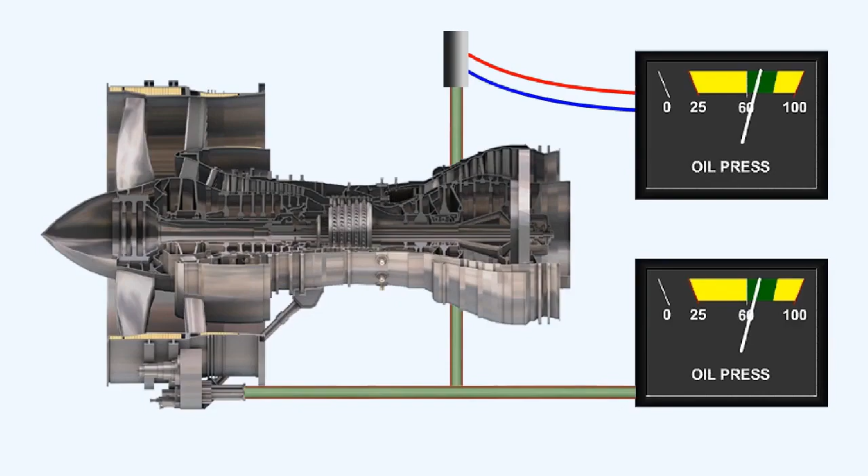In many of the systems associated with the operation of the aircraft and its engines, liquids and gases are used, the pressures of which must be measured and indicated. The gauges and indicating systems fall into two categories: direct reading and remote indicating.

A remote indicating system uses a remotely positioned sensing element, which is connected to the pressure source. The sensing element translates the actual pressure reading into an electrical signal, then sends the signal via electrical wiring from its remote position to an instrument in the cockpit.

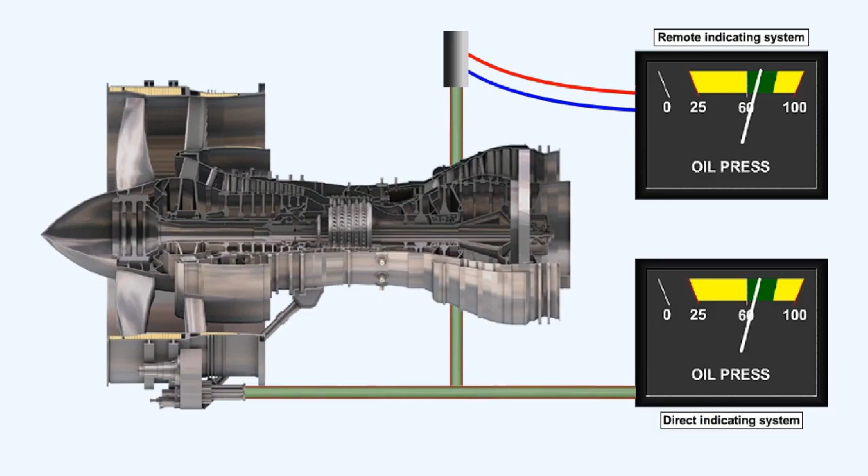A direct reading pressure instrument is physically connected to the source of the pressure that it's sensing. For instance, a direct reading engine oil pressure gauge will be connected via an oil pressure pipeline directly to the engine, to the point where the oil pressure is to be measured. Colored arcs of green, amber, or red are used to indicate the range and limits of the pressure system.

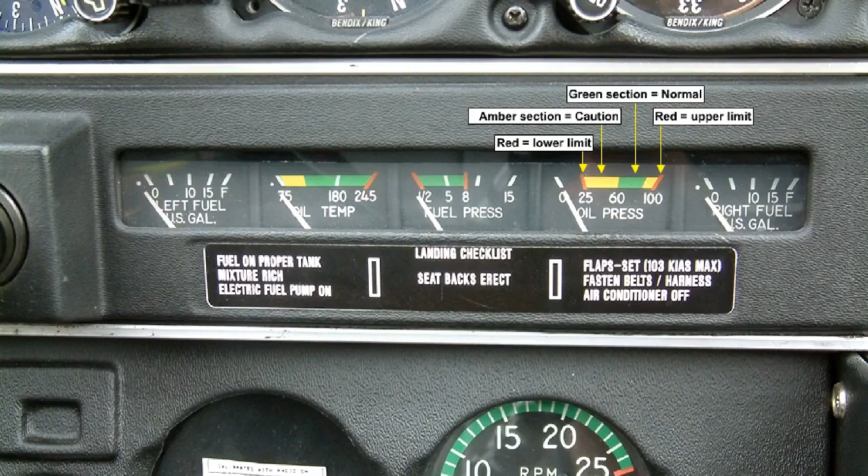Vibration monitoring equipment is fitted to almost all commercial jet engine aircraft. Although gas turbine engines have an extremely low vibration level, any change in that level is usually indicative of damage which may lead to failure.

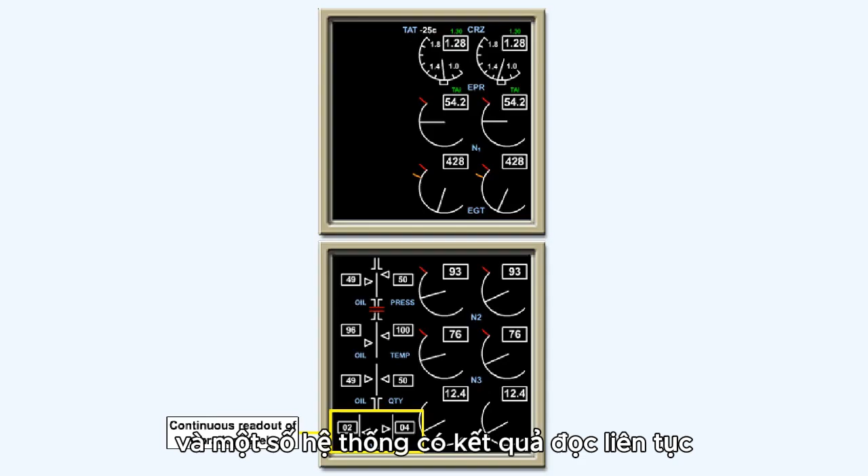Warnings will be given in the cockpit if the vibration levels are exceeded, and some systems have a continuous readout of vibration levels. Modern engines have the facility whereby the vibration level of each rotating assembly can be monitored, so that the source of any vibration can be pinpointed.

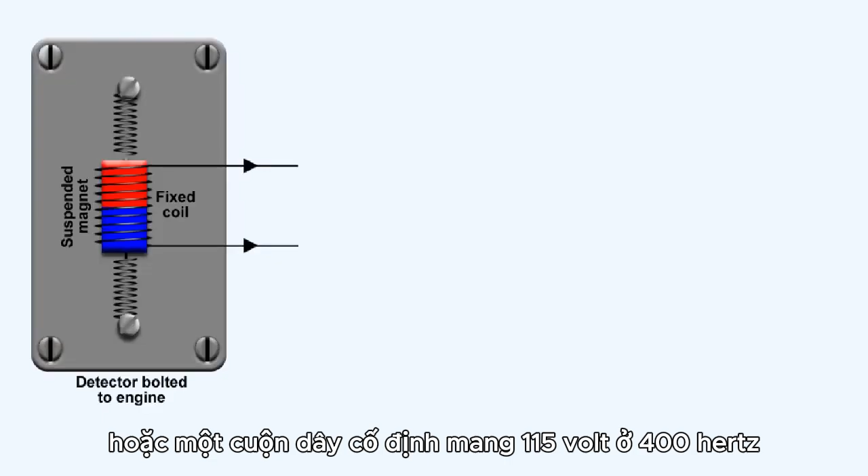The principle upon which vibration monitoring equipment works requires an input from a detector, which can be either a piezoelectrical crystal mounted strategically on the engine, or a fixed coil carrying 115 volts at 400 Hz, the output of which will be affected by the movement of a magnet within it, which is mounted on springs.

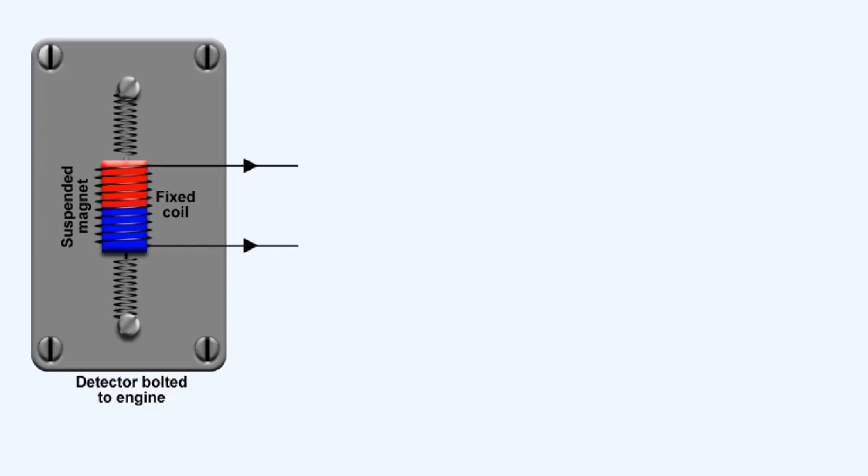In either case, the frequency of the incoming vibrations will be amplified, and then filtered so that only those frequencies that are indicative of damage occurring to the engine will affect the output.

The output of the detector will affect the current flowing through the coil into the amplifier and filter. The filter will erase any output which is normal to the engine, but allow through to the amplifier any frequency that's considered to be harmful to the engine.

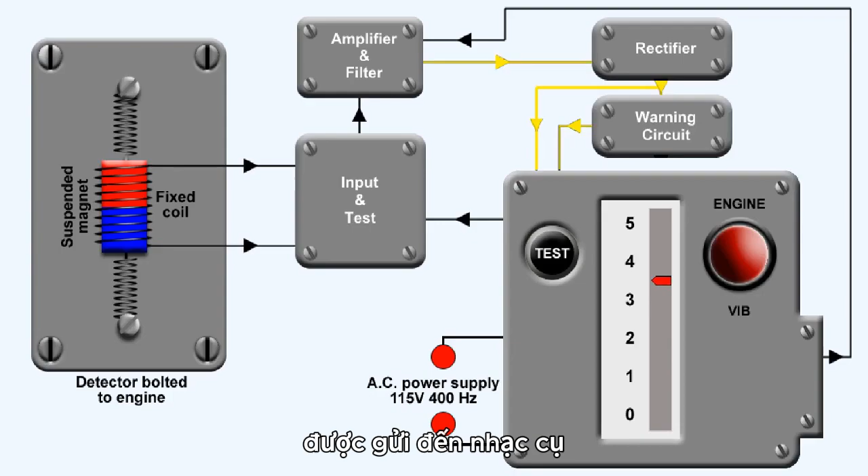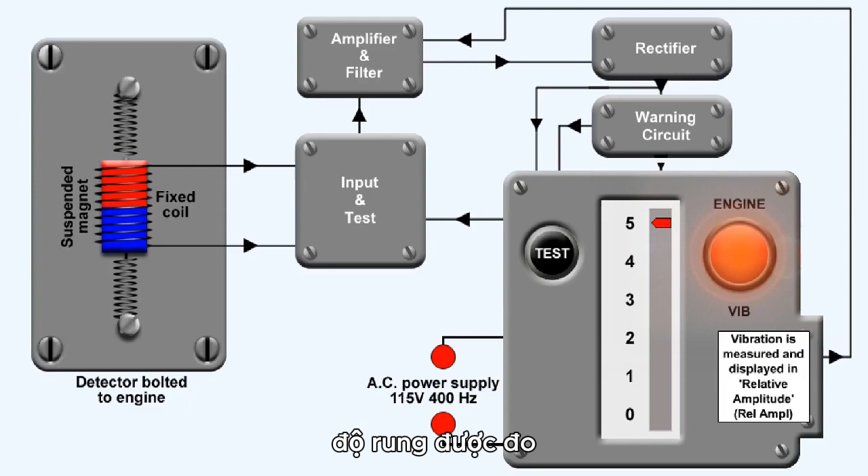The result of this amplification is sent to the instrument via the rectifier and warning circuit. The needle will show the appropriate deflection for the amount of vibration being suffered by the engine at that time. If the level of vibration exceeds a predetermined amount, a warning light on the instrument illuminates. Vibration is measured and displayed in relative amplitude.

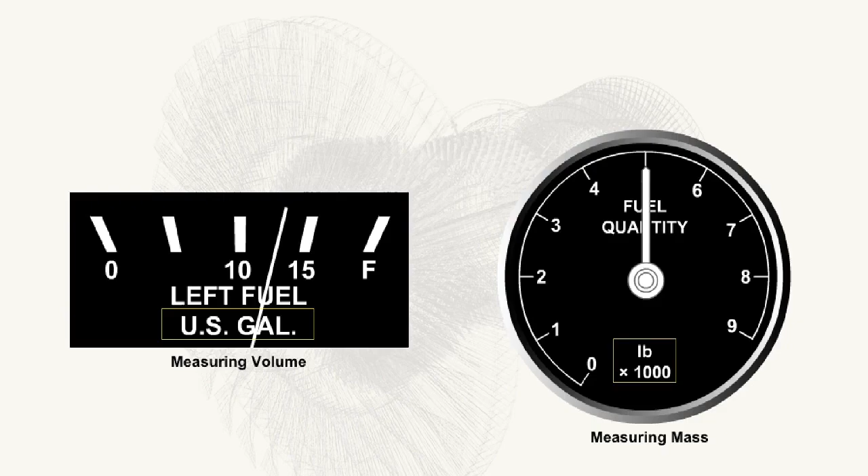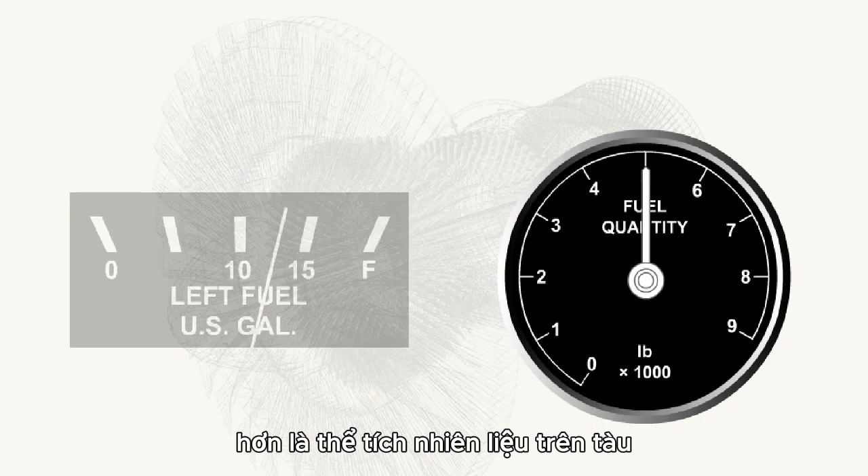There are two methods of indicating the quantity of fuel carried in an aircraft. Either the volume, for example gallons, or the mass, kilograms or pounds, are measured. Because the mass of the fuel on board is of more interest to the pilot of a large aircraft than is the volume of the fuel on board, measurement of the volume of fuel is now only used on light aircraft.

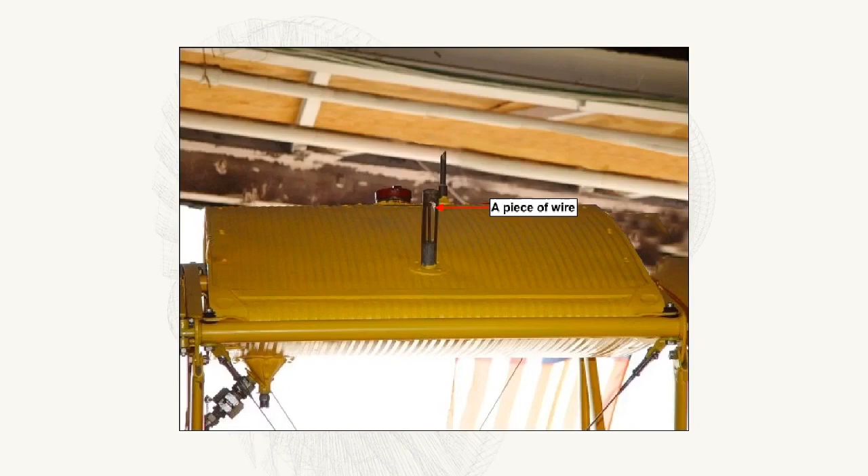The simplest form of volume indication is a float system. Early aircraft used a float which sat on the surface of the fuel in the tank. Attached to the float was a piece of wire that protruded out of the top of the fuel tank. As the fuel level reduced, so the wire disappeared from view.

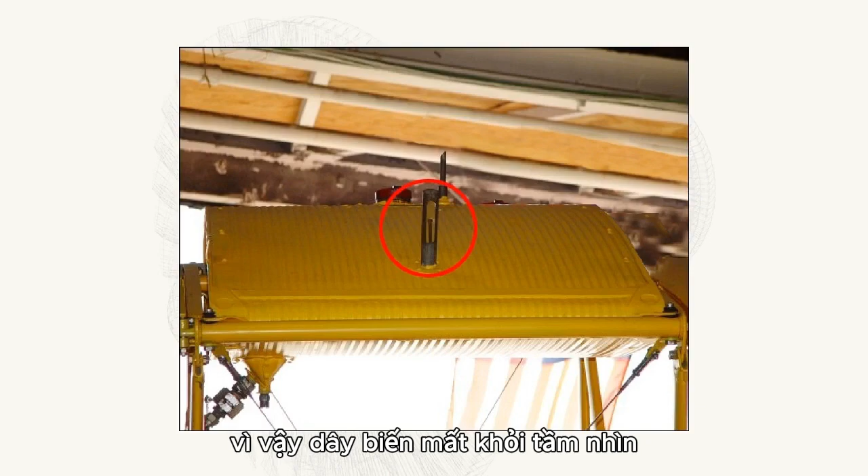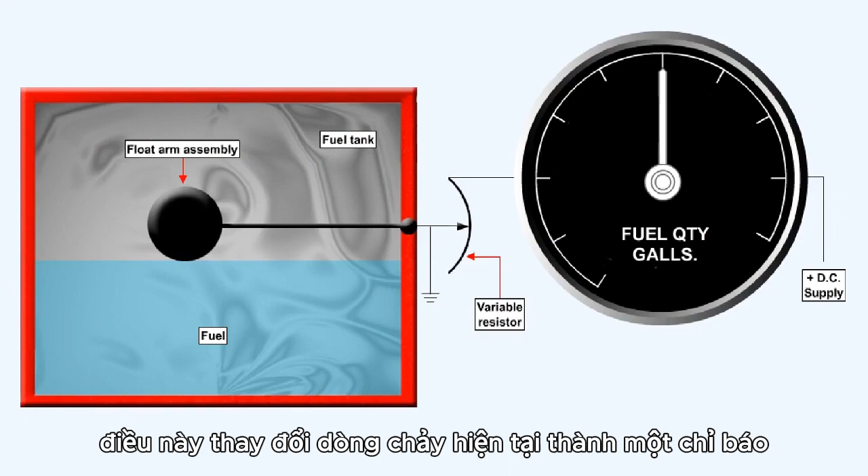A later system used the float to reposition a wiper on a variable resistor. This varied the current flowing to an indicator which had a pointer that moved over a scale calibrated in volume. The system was powered by direct current.

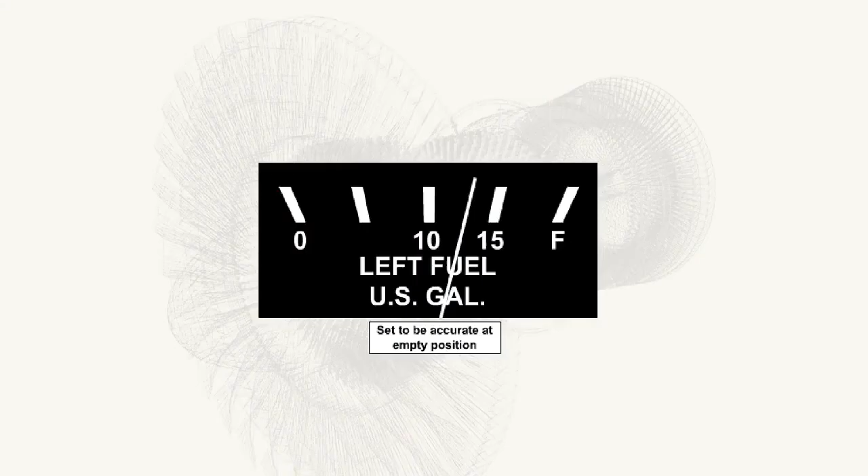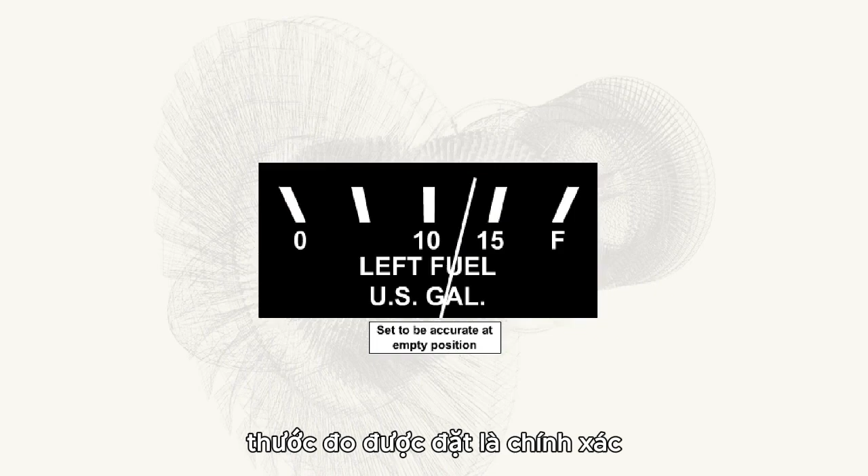The disadvantage of the float system is that the indication is not linear, and there is no provision for making adjustments for system accuracy. The gauge is set to be accurate at the low and empty positions. The system is also subject to errors caused by temperature changes, aircraft attitude changes, and aircraft acceleration.

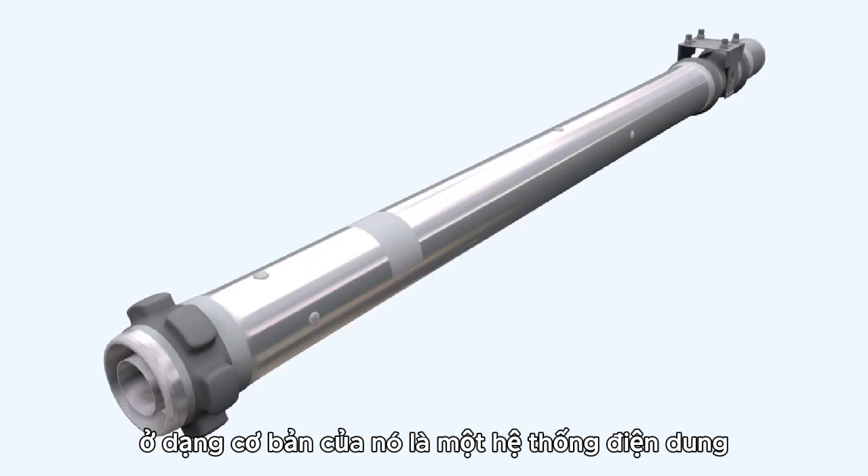In its basic form, a capacitance system, which is much more accurate than the float system, consists of a tank unit, which is effectively a variable capacitor, located in the fuel tank, together with an amplifier and an indicator. A tank unit consists of two concentric aluminium alloy tubes, which are held apart by pairs of insulating pins. The coaxial electrical connections are insulated and the unit is insulated from the tank.

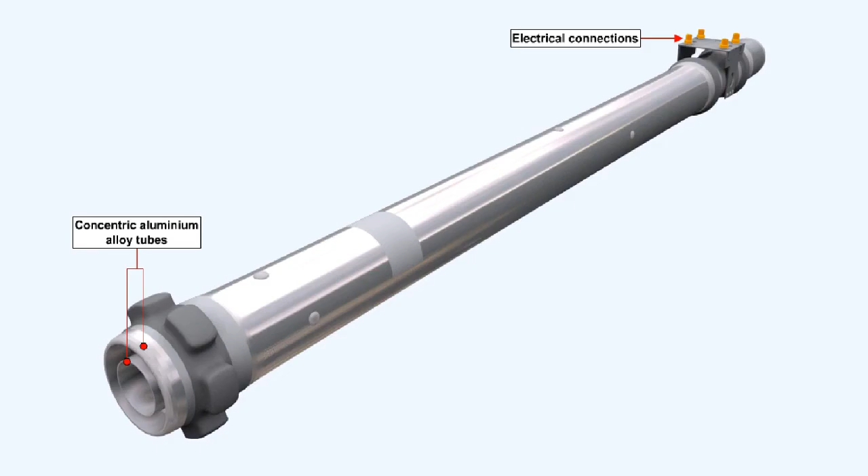The principle of operation of the capacitance system is based on the use of fuel and air as the dielectric between parallel plate capacitors, which have a fixed area and a fixed distance between them. The only variable in the system is then the ratio of the dielectrics used, which are fuel and air. That ratio is determined by the quantity of fuel in the tank.

Incorporated in the system are reference units, which reduce indication errors that would occur if the dielectric constant of the fuel changes from its normal value, which is about twice that of air, and directly proportional to its density. Reference units are located on the lower end of a tank unit, and are always totally submerged in the unusable fuel that remains in the tank.

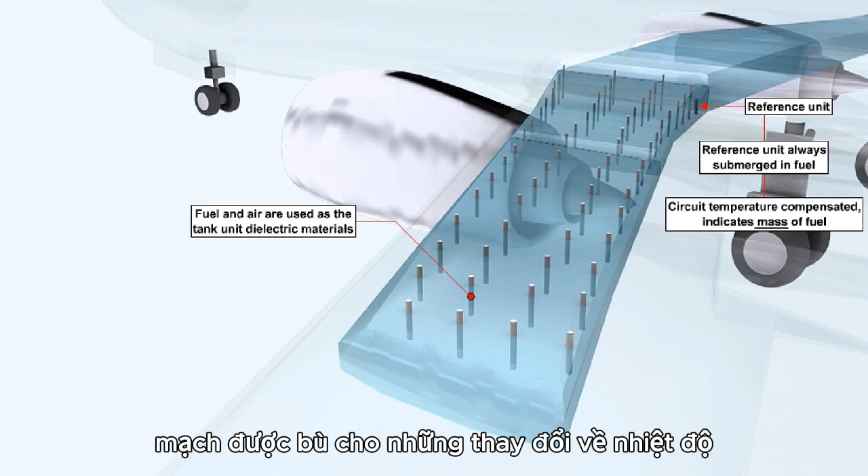The circuit is compensated for changes in temperature, and will indicate the mass of the fuel in the tanks. Fuel gauging systems can incorporate an additional indicator known as the fuel totalizer, which can indicate the sum of all of the tank quantities.

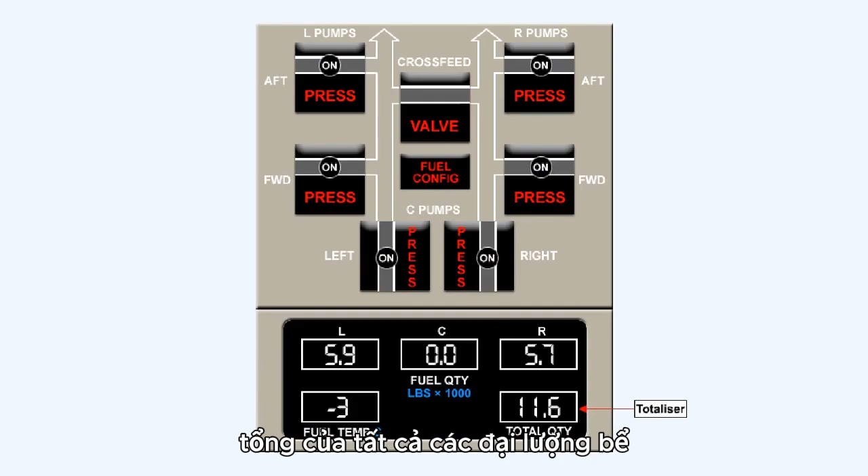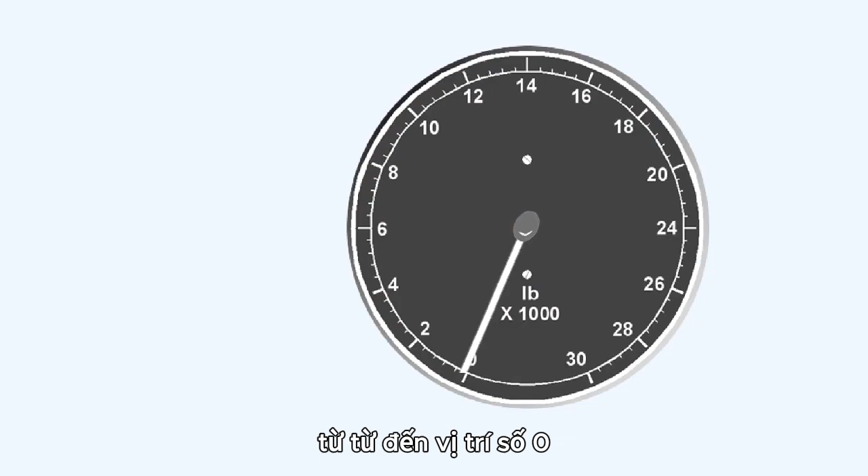In the event of a gauge failure, the fuel gauging system will fail safe and drive the needle of the failed indicator slowly to the 0 position. A test circuit is incorporated, which will simulate gauge failure. Place your cursor over the test button to activate the test. When the test switch is released, the pointer should return to its original position.

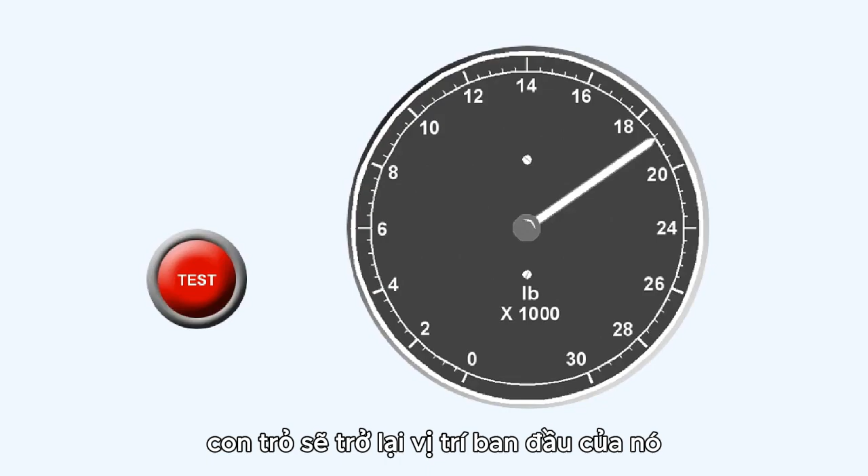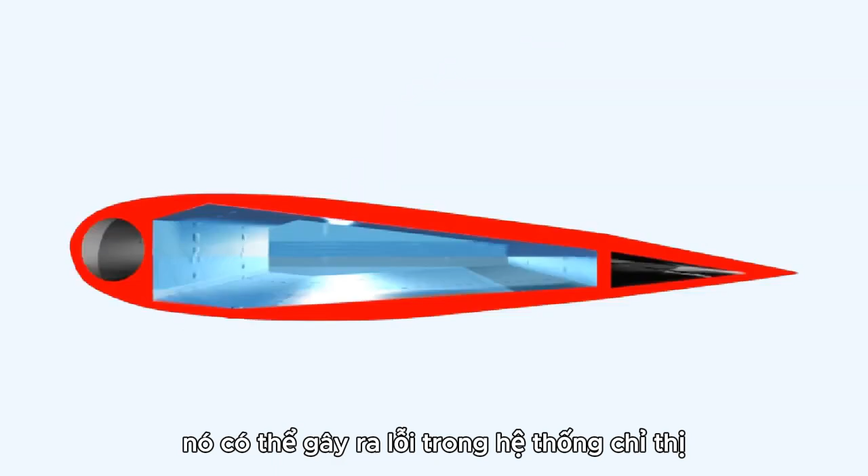If water is present in the fuel, it can cause errors in the indicating system. If the percentage of water is very large, the capacitors in the sensing units can be effectively shorted out. If this happens, the indicator needle will be driven beyond full scale.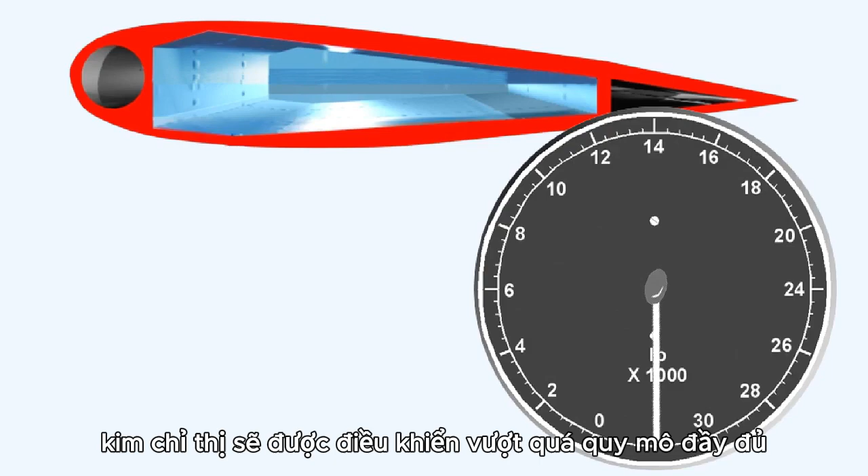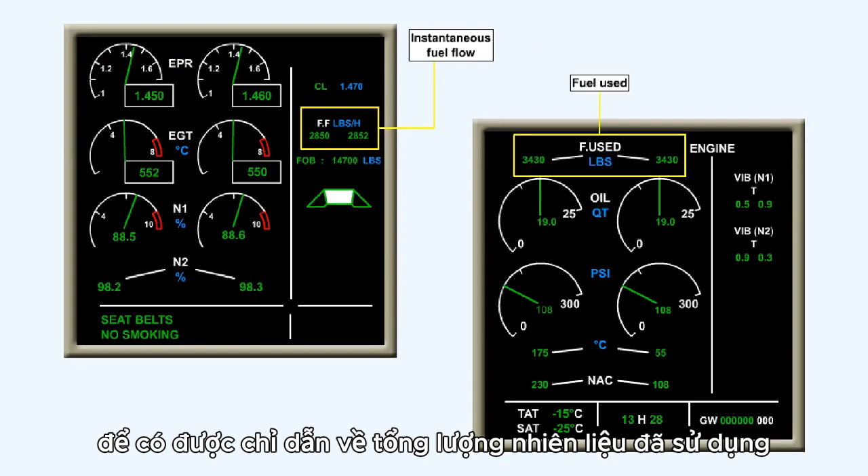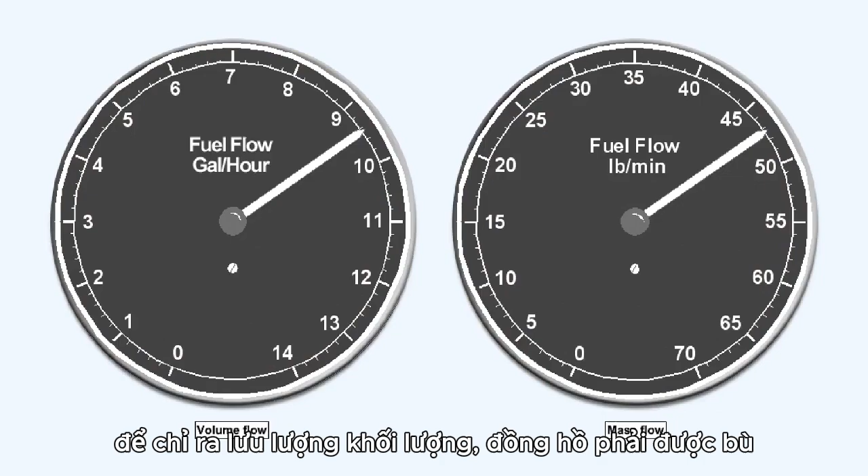As well as the quantity of fuel measured, the instantaneous fuel flow can be shown. To obtain the indication of total fuel used, the instantaneous fuel flow must be integrated. The fuel flow meter can display either volume flow or mass flow. To indicate mass flow, the meter must be compensated for the density of the fuel.

A fuel pressure gauge can be adapted to be used as a simple flow meter. This system is used on many light piston engine injection systems.

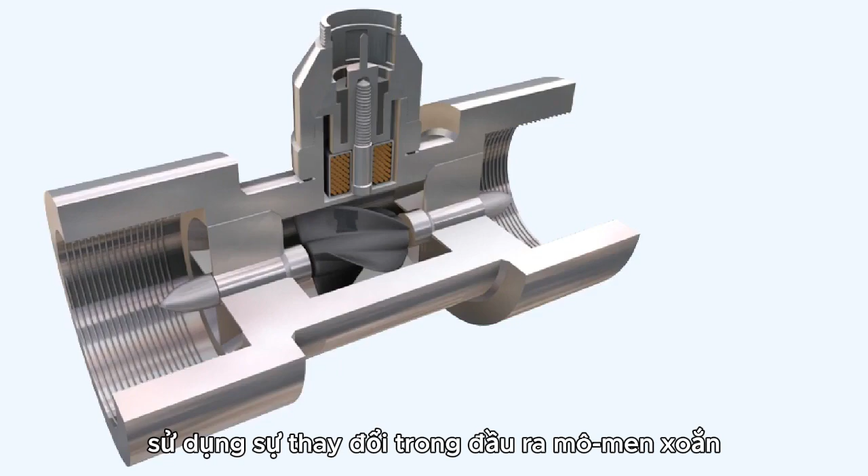Most gas turbine engines use an electrical sensor, which utilizes the change in either the torque output or the rotational speed of an impeller situated in the high-pressure fuel line to the fuel spray nozzles.

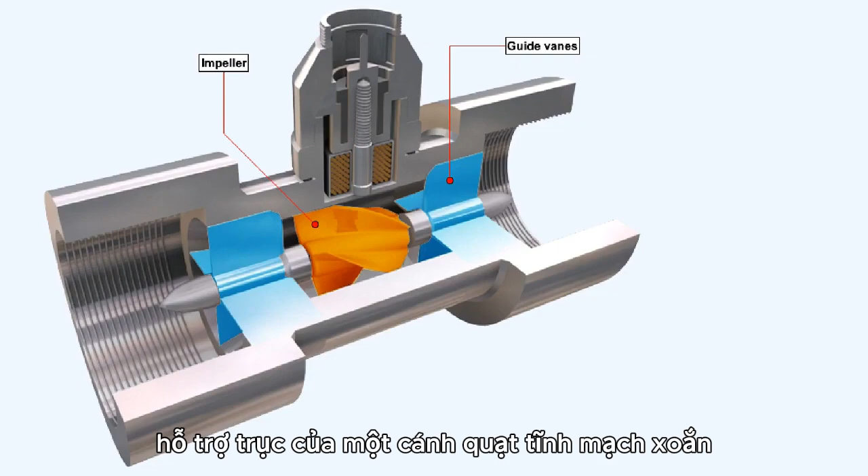This type of fuel flow meter consists of a cylindrical light alloy casting, within which are guide vanes that support the shaft of a helical vane impeller. The impeller has a magnet embedded in it. Electrical pick-off coils are situated in the wall of the cylinder casting.

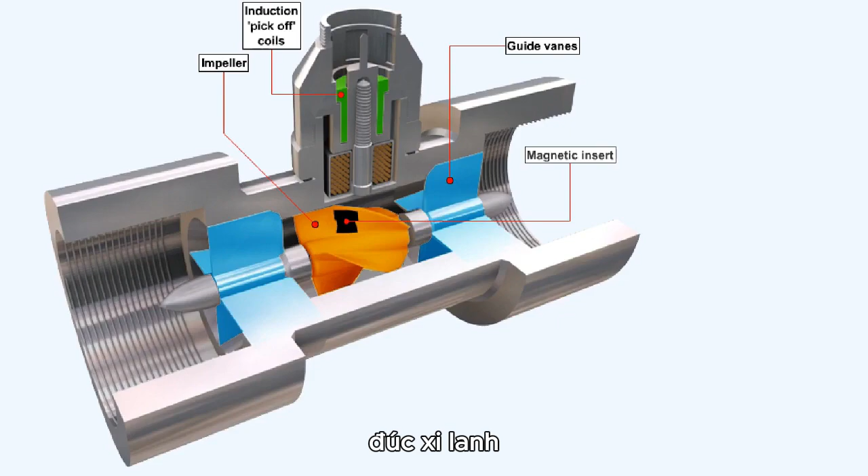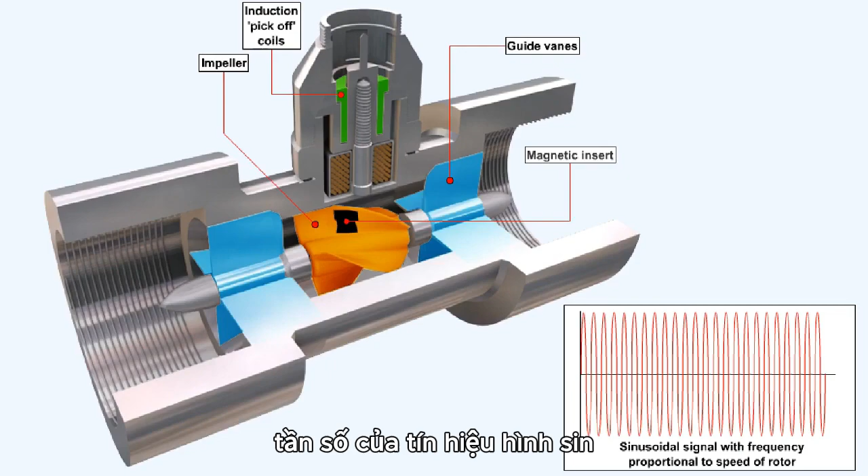When the fuel flow rotates the impeller, a sinusoidal signal is induced in the pick-off coils. The frequency of the sinusoidal signal is proportional to the speed of the rotor, which in turn is proportional to the rate of flow.

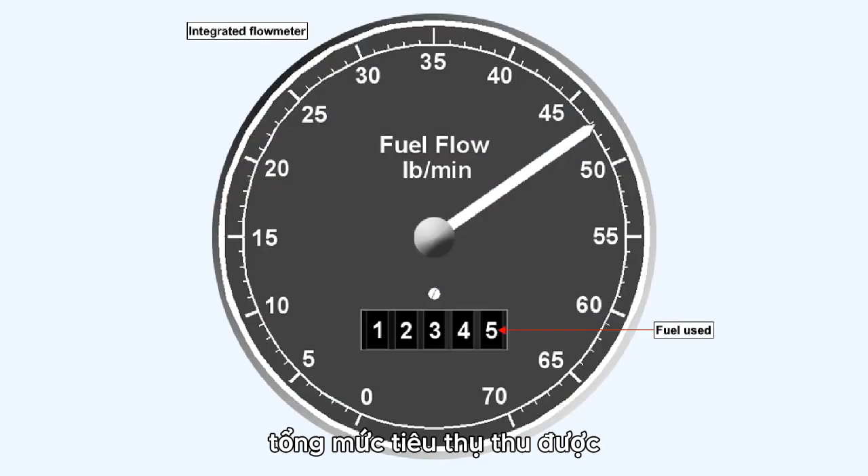The total consumption is obtained by integrating the rate of fuel consumption over time. A flow meter that displays fuel consumed as well as fuel flow is called an integrated flow meter.

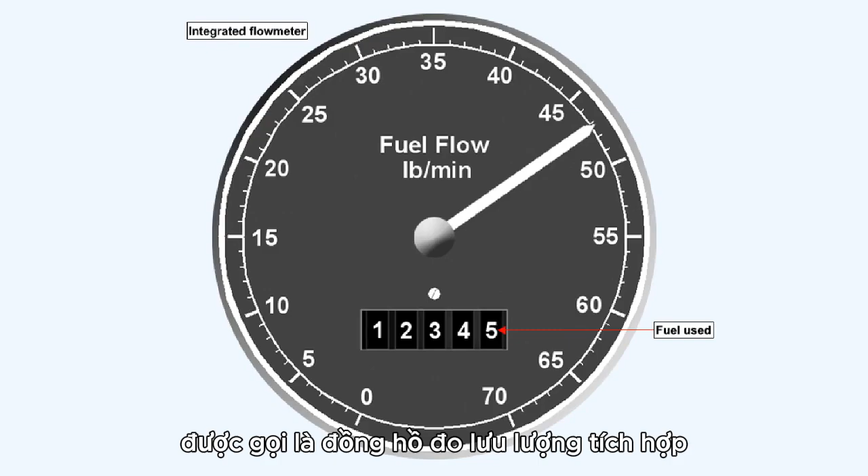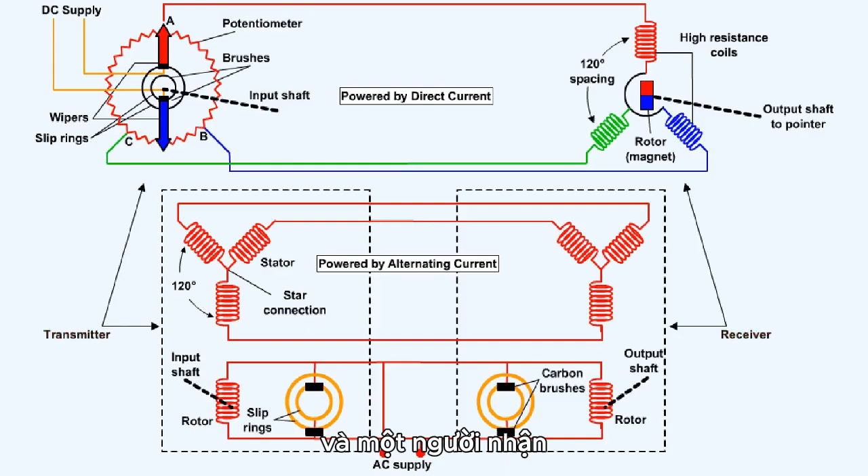Modern aircraft employ remote indicating systems that can be powered by either direct current or alternating current supplies. Whatever the power source, each data transmission system employs a remotely positioned transmitter located at the source of the information, and a receiver which responds to the information received.

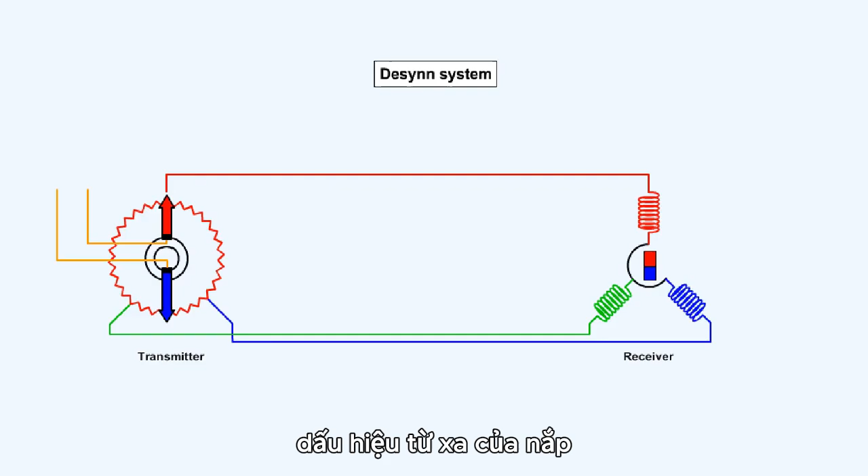The Desynn transmission system is a simple transmission system with low torque characteristics, which is used for the remote indication of angular position. It's often used where a simple pointer and scale is adequate, for example, remote indication of flap, rudder and elevator positions, or to repeat the reading of an instrument at a remote point. The accuracy of the system is approximately plus or minus 2%.

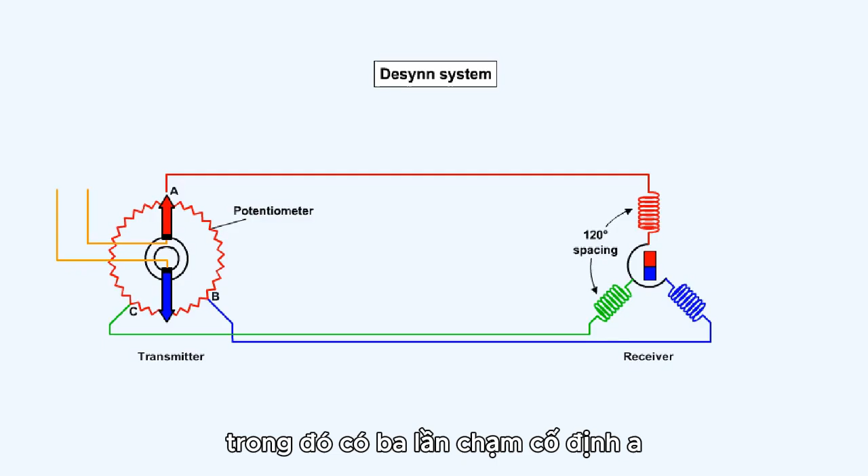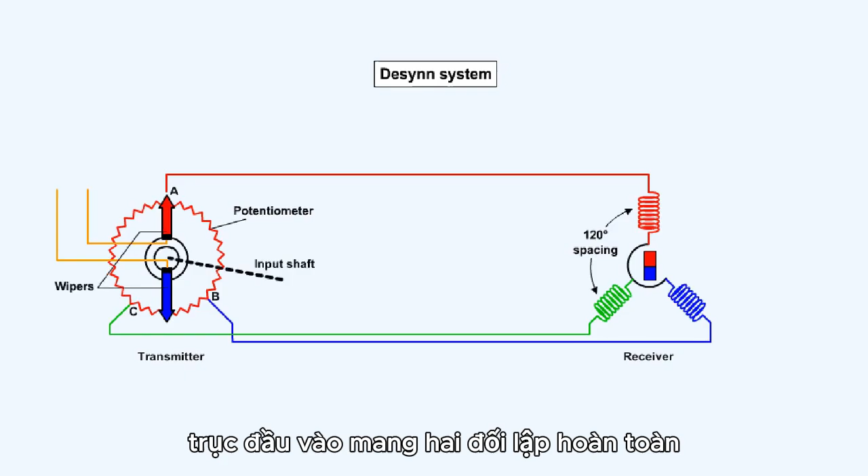The transmitter consists of a continuous resistance ring or potentiometer, which has three fixed tappings, A, B and C, spaced 120 degrees apart, which are connected to the receiver. The input shaft carries two diametrically opposed spring-loaded sliding contacts, or wipers, which are in contact with the potentiometer. The wipers are fed via slip rings and brushes with direct current.

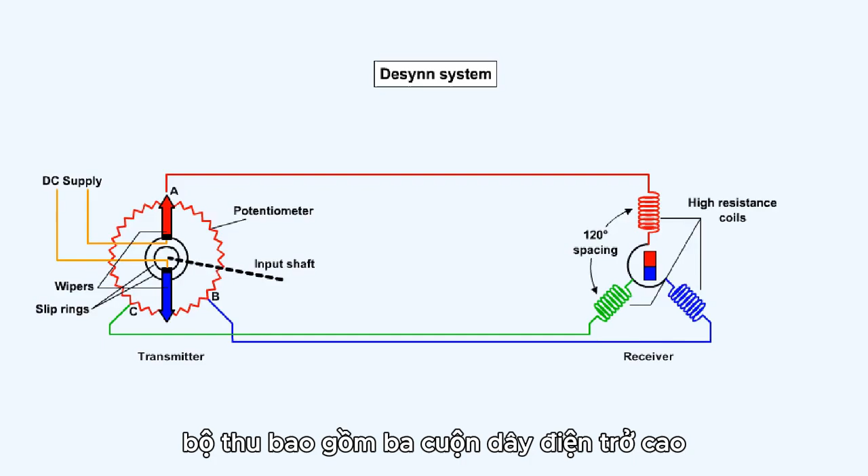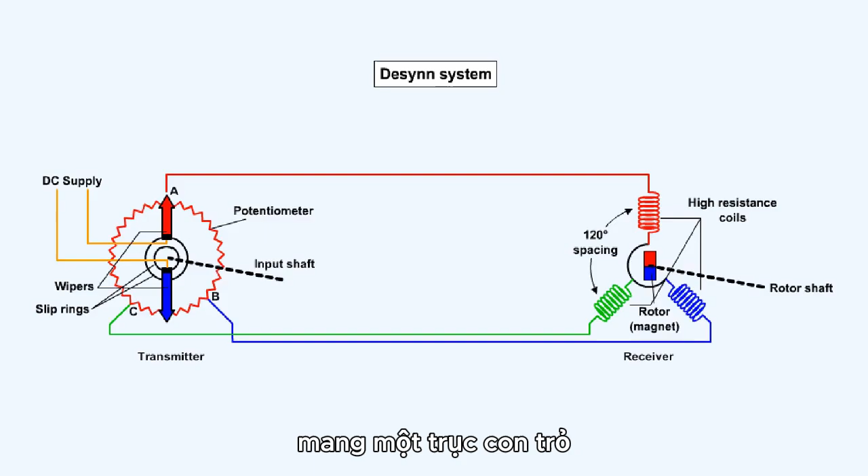The receiver consists of three high-resistance coils, whose axes are spaced 120 degrees apart, with a permanent magnet rotor pivoted at their center carrying a pointer shaft. The three coils are connected to the tapping points A, B and C in the transmitter.

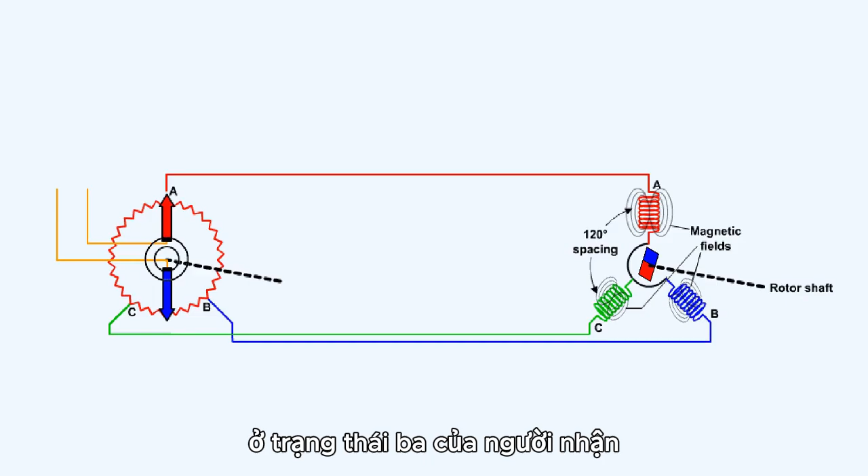When direct current is applied to the transmitter wipers, the voltages at the tapping points A, B and C produce a current flow in the three stators of the receiver, and a resultant magnetic field is produced. The rotor magnet aligns itself with this magnetic field.

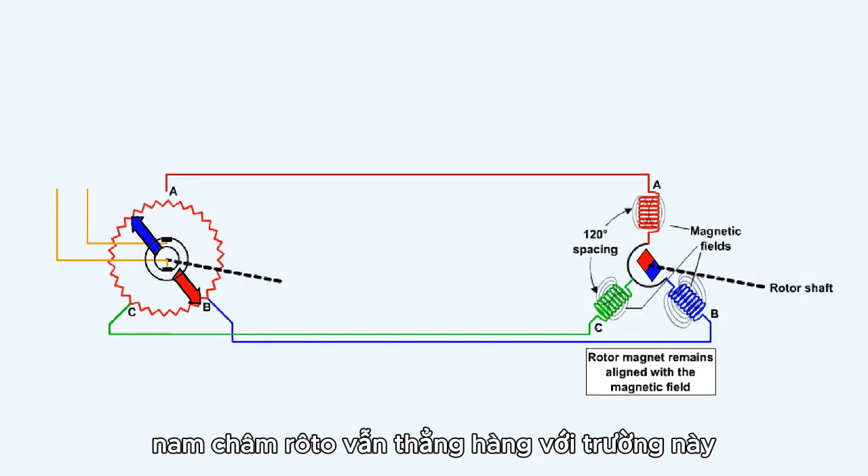The magnitude and polarity of each tapping point voltage varies according to the position of the wipers, and thus, if the input shaft is rotated, the change of voltages at A, B and C produces a variation in the current flowing in the stator coils, and rotation of the resultant magnetic field in sympathy with the rotation of the input shaft. The rotor magnet remains aligned with this field at all times, and so rotates in synchronism with the input shaft.

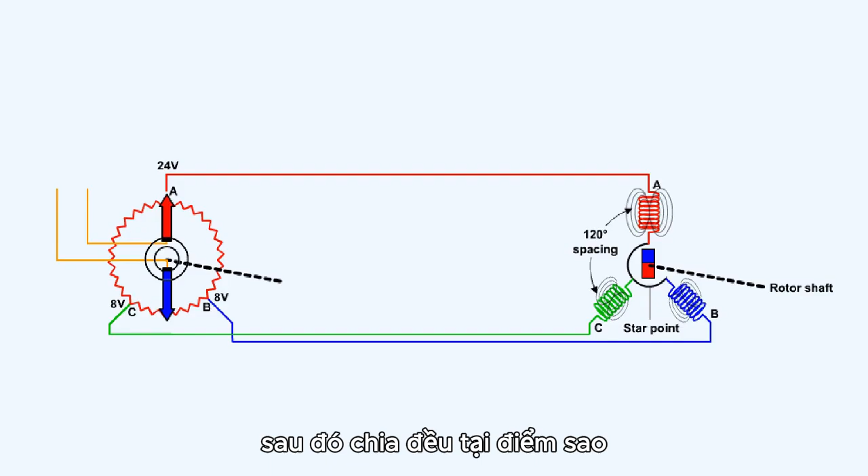Here the voltage distribution around the potentiometer is such that point A is at plus 24 volts, while points B and C are both at plus 8 volts. Because the voltage at A differs from that at B and C by the same amount, current flows from A through coil A in the receiver, then divides equally at the star point, with half the total current flowing through coil B and half through coil C back to the transmitter. The resultant magnetic field in the receiver, with which the rotor magnet aligns itself, is compounded from the vectors representing the individual fields.

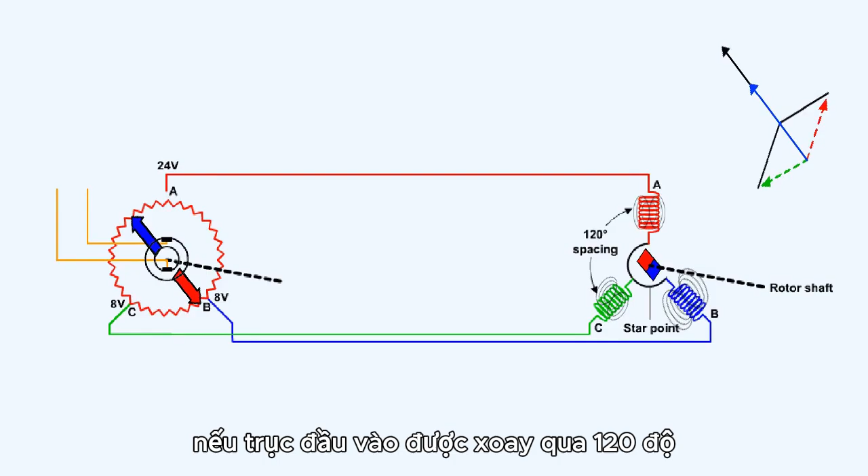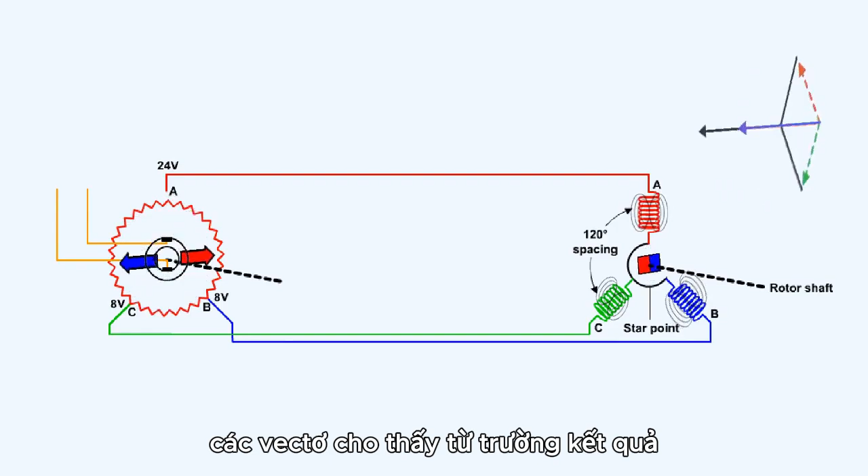If the input shaft is rotated through 120 degrees in a clockwise direction, as shown here, the voltage distribution around the potentiometer is such that the current flows from B through coil B in the receiver, then divides equally to flow through coils A and C back to the transmitter. The vectors show that the resultant magnetic field also rotates through 120 degrees clockwise, and the rotor shaft aligns itself along this new axis.